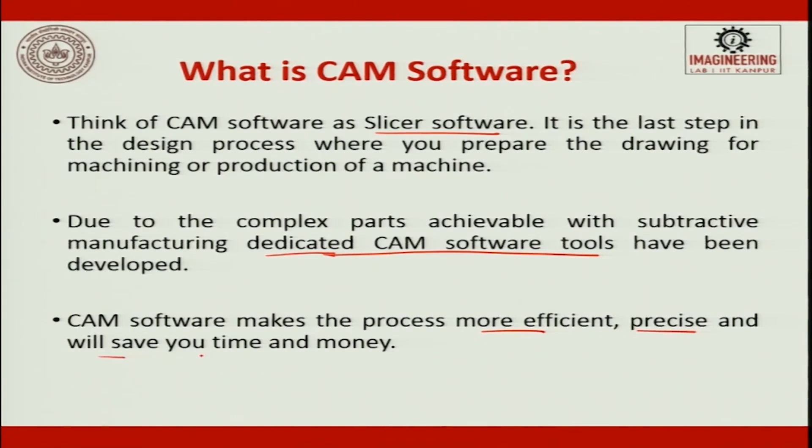Now, which CAM software to use, that we will discuss. These are a few popular CAM softwares: CAMWorks, CATIA, Fusion 360, Mastercam, PowerMill, Siemens NX CAM, and SolidCAM. Let us try to see the features of these one by one.

CAMWorks - this software type is plug-in. There are three major types: plug-in, standalone, and built-in. What is the difference? Standalone software is a separate software that you procure separately from any of the CAD softwares or machines.

That is completely standalone software, like PowerMill software, which was standalone when it was with Delcam. Now PowerMill has been taken over by Autodesk and it has become a plug-in. And what is built-in?

Built-in, suppose you purchase CATIA. With CATIA, you get the CATIA CAM software as well, built into the CAD software as a module. So again, built-in, plug-in, and standalone - there are three types of software.

So this software, CAMWorks, is actually plug-in. The operating system is Microsoft Windows, and it supports certain file formats - the major ones being DXF, STP, STEP, and STL. These are the major file formats used, and DWF is also majorly used. This is the interface of this software.

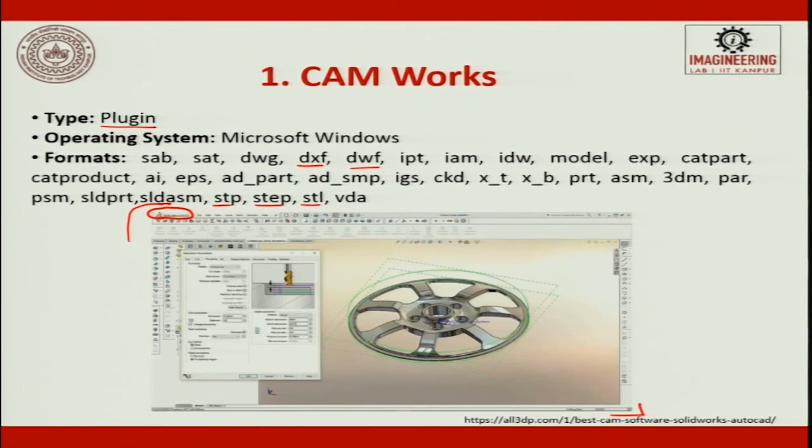The similar software is CATIA. CATIA is a built-in software, operating system Microsoft Windows. It supports these many formats - IGS is the major format that is used. This is the major interface of this software.

CATIA, the full form is Computer Aided 3-Dimensional Interactive Application. It was basically designed for automotive, shipbuilding, industrial equipment and architecture. It is also a multi-platform application that covers all major fields of manufacturing, such as 3D CAD software, computer aided engineering software suite, and highly advanced CAM.

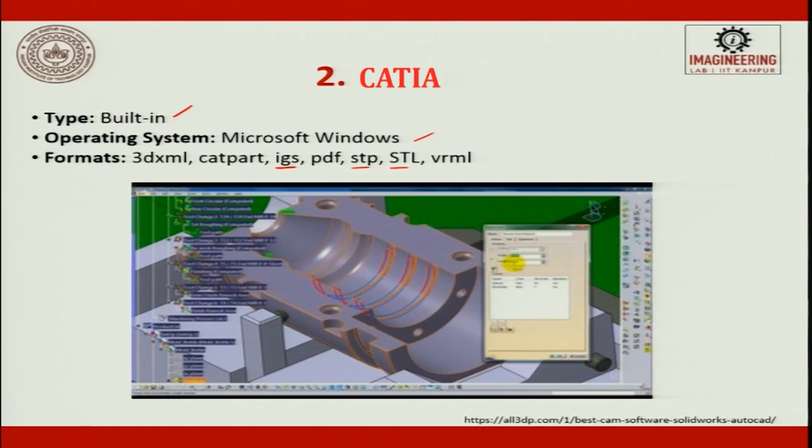CATIA supports high speed machining operations. It also supports up to 5 axes of machining, spiral milling, and Z level milling. So many different kinds of machining can be taken care of by this software. CATIA is the way to go; it is developing so fast. CATIA is a very important and suggestible software if we are looking for industrial manufacturing processes.

Next is Fusion 360. Like SolidWorks works upon parts, Fusion 360 works majorly upon assemblies. So Fusion 360 is an assembly or integrated based system, with a built-in CAM. It works with Microsoft Windows as well as Mac, and supports certain formats.

It includes comprehensive CAM software tools, integration of CAM into an advanced CAD program, which effectively increases overall productivity. Unlike other professional solid body 3D modeling software, Fusion 360 is very strong in usability. It covers the whole process of planning, testing, and executing a 3D design. It has powerful parametric tools and analytic mesh tools well suited to the most challenging industrial designs. It is also able to simulate both the construction of the designed components as well as the stresses these components would face once put into use.

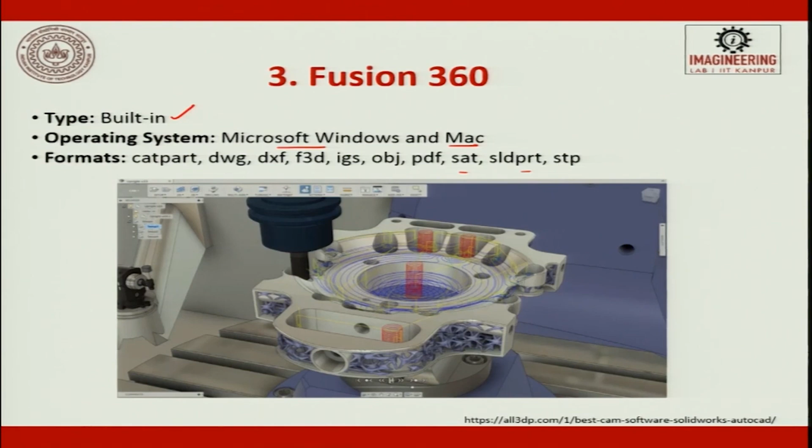One of the very broadly used software is MasterCam. This is both standalone and plug-in, with operating system Microsoft Windows. There are many platforms and file extensions that it supports. MasterCam is majorly known for its nesting. However, it can also do 3D milling, nesting, engraving, and all these things up to 5 axes of machining.

Nesting creates efficient interlocking parts that assure optimal material usage for the highest possible yields. Its feature based machining evaluates a part's features and automatically designs an effective machining strategy. This is also a standalone and CAD CAM software, and the CAM portion is also available as an integrated CAM solution. There are many applications for this software.

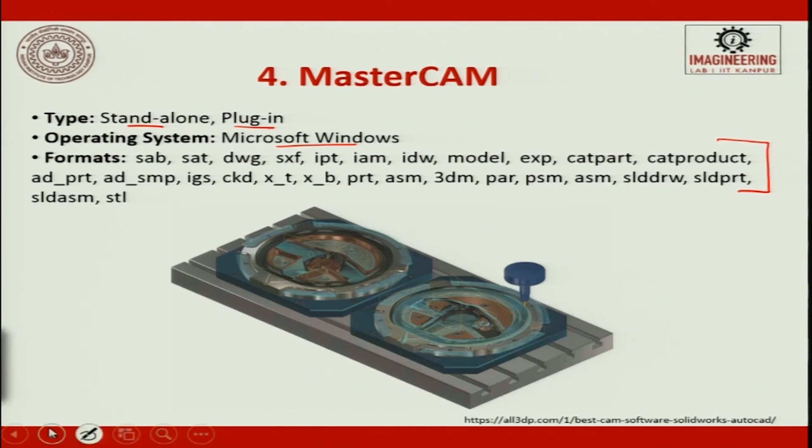Next is PowerMill. PowerMill is software for which we will see a demonstration in the laboratory session in the next lecture. The PowerMill we have in the laboratory is Delcam PowerMill, the previous version of the CAM PowerMill, which was a standalone software. Now PowerMill is a plug-in software — the old version was standalone and the new version is plug-in, since it was purchased by Autodesk. It works with Microsoft Windows, and these are the platforms it supports.

Autodesk being the leader in the industry, though there are specific applications for which different kinds of software had been developed, AutoCAD was one of the beginning softwares. Autodesk is still taking care of so many things nowadays as well. PowerMill is one of the biggest or most used software in history, I would say, and that is now taken by Autodesk.

This CAM software also features a large library of post processing procedures for the most popular machines. It checks the motions of your tools in detailed simulation to ensure that your equipment will not be damaged — we will see this in the software demonstration in the next lecture. In addition, PowerMill brings comprehensive analytical tools that allow, for instance, identifying unmachined stock that is not machined properly.

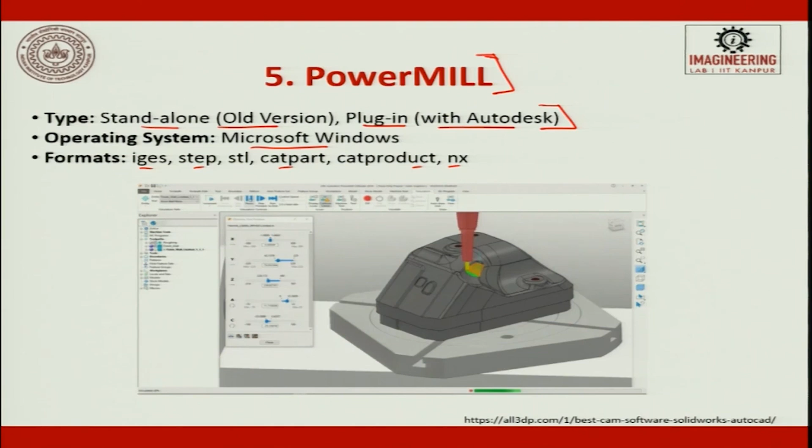As I just mentioned, Siemens NX software is a plugin software. It works in all the majorly available operating systems like Windows, Mac and Linux. Siemens goes way beyond just being a CAM software. We will also discuss the Siemens plant layout software, and Siemens PLM.

What is PLM? Product Lifecycle Management. Siemens PLM software includes everything: the design, then manufacturing — that is CAD, CAM — then after manufacturing is set, it takes care of the machining or 3D manufacturing, whether additive or subtractive. Then it takes care of the layout for the manufacturing unit as well, the factory. Then it takes care of ERP, Enterprise Resource Planning.

So, all these modules are taken care of by Siemens. Being part of the biggest system, or we better call it system of systems, Siemens NX CAM becomes an icon. Siemens NX CAM can be used to set up and control entire manufacturing cycles for milling or turning machines.

For example, it provides a solution for automotive stamping dies and incorporates numerous industry best practices for automating the design, sizing, validation and documentation of electrodes. So many things can happen. Some people who use this software claim that its feature-based machining can dramatically reduce programming time, since it automatically recognizes and programs machining feature types.

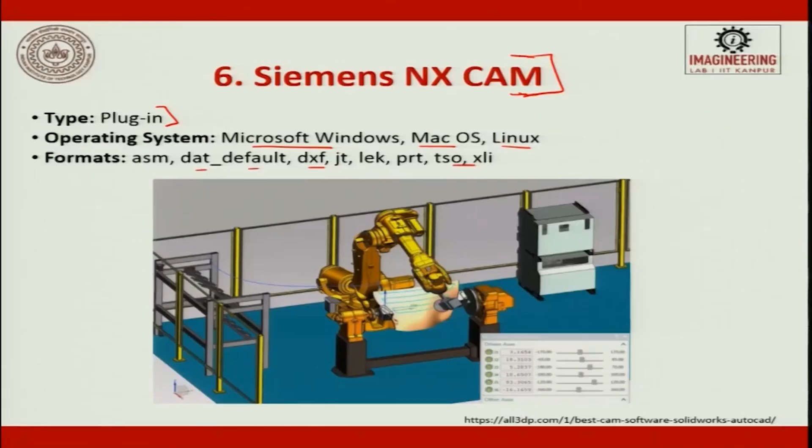Now, the last software I have picked to discuss here is SolidCAM. SolidCAM also comes in standalone and plugin types. The operating system is Windows. It supports the normally used formats, which I have underlined here.

So, this is the interface for this software, SolidCAM. This integrates directly into SolidWorks and Inventor as well. Inventor is also one of the CAD softwares, along with SolidWorks.

This doesn't just mean you can program tooling paths from the comfort of the CAD software, but it is also advantageous in that all tool paths retain association with the original CAD design. So, simply put, any changes made to the CAD file will instantly be reflected in the updated tool paths, saving you time and money.

This takes out the guesswork in milling, turning and other processes using patented technology wizards. This software automatically fine tunes your feeds, speeds, depth of cut, width of cut and other cutting parameters. It also recognizes the distinct geometrical features of your design and assigns tool paths accordingly, eliminating the need for time-consuming manual geometry definition.

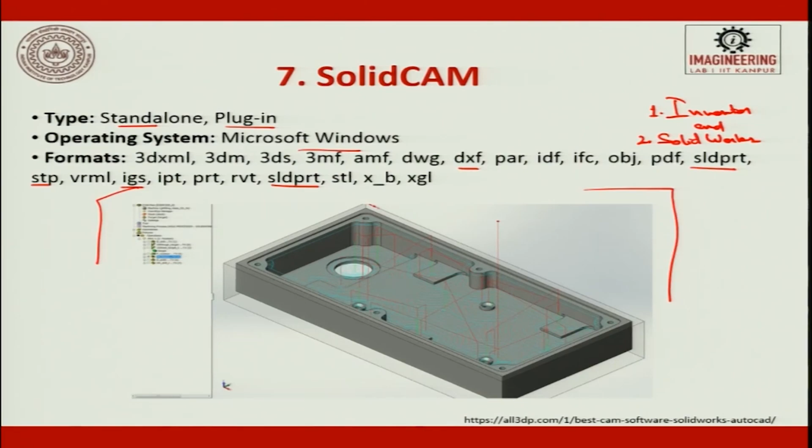Now, which software should you use? This is an important factor. I might be more comfortable with SolidWorks, while my students might be more comfortable with CATIA, and others work with Fusion 360. It all depends on which CAD software you use. Accordingly, the CAM software will be more comfortable for you to use. It depends upon the requirements of the designs and the CAD software being used.

There are three basic kinds of CAM software: built-in, standalone, and plugins. So which one should you use? If it is built-in, you will definitely be more comfortable with the software integrated within your CAD suite. If it is a plugin, that is also comfortable to use.

Now comes the case when the software is standalone. Standalone softwares are dedicated CAM softwares, capable of powerful CAM operations that allow creating complex geometries like free-form geometries. But one flip side is that associativity is lost when the native CAD file cannot be imported. So it's important that your CAM software and CAD program support the same file formats, like IGS, STEP, or STL, whichever you pick - these are important factors.

So, which software to use all depends upon your choice and also on the software that is available. Cost is also one of the factors when picking software. Sometimes machines come with software provided by the manufacturer itself - for instance, some manufacturers provide a 50% discount on PowerMill. So there are certain factors that matter.